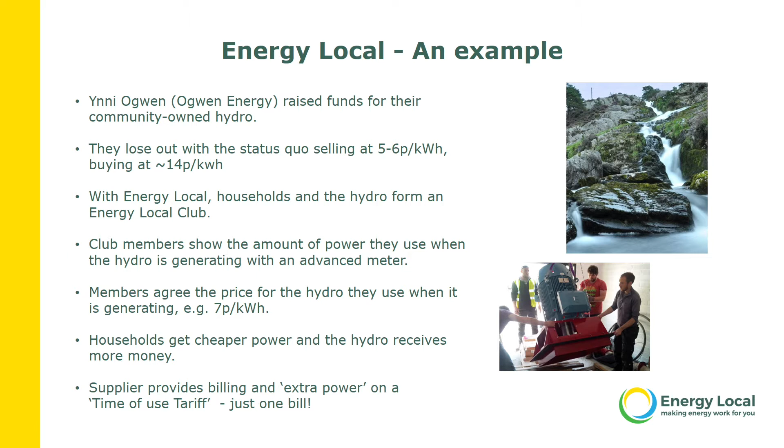So this project, under this work stream, is a means to make it much easier for people to get the best out of Energy Local.

One of the things to emphasize in what I've described is it's what we call before gate closure. There's a lot of work about, oh my goodness, we haven't got enough power, or we need to mop up all that solar after what's called gate closure - that's the point after everybody stops trading electricity and National Grid takes over. What we're doing here is saying, how about we encourage people to use power the way we'd like them to before that point.

So we're actually changing the demand curve so we don't get into that slightly emergency situation in the first place. We're focusing initially on Energy Local Bethesda - there's just 100 households, they all have half-hour settlement. First of all we started with what we call an energy dashboard, to show the good and bad times to use power during the day.

And now we're developing what's called the Energy Local Home Hub. It means people can say, I need this appliance finished by X time, it takes this long to run, find the best time to run it during the day. So if it was a sunny day, it might be in the middle of the day if it's solar, for example. The household stays in control, so it gets away from that feeling of big brother switching your washing machine on for you.

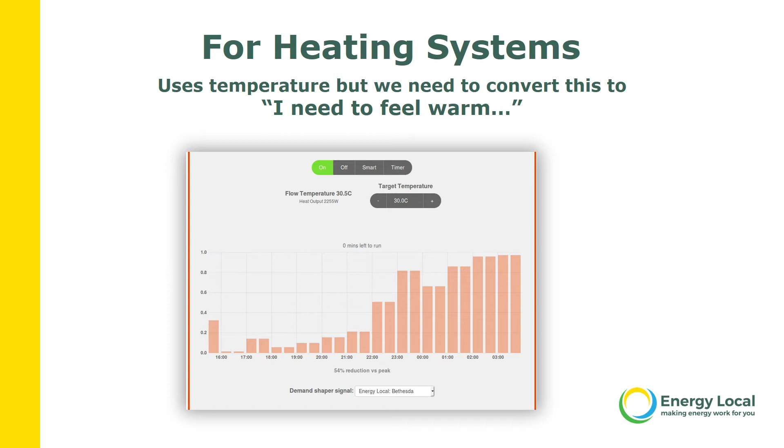All that said, although we're trying to do this before gate closure, we have also demonstrated the principle of sending an emergency turn-down signal if things are really going a bit pear-shaped. It automatically uploads this to the demand signal, so it will reschedule any loads that have been scheduled to avoid that time. And we've shown that in principle.

Originally, we'd have to wait until there actually was an emergency to show it in anger, but we have actually shown the principle of it. And I was monitoring my washing machine, and it moved its schedule to a better time.

That said, it's not something that we want to use the whole time, because the whole idea of this is that we're actually trying to change people's habits. And if you keep sending erratic signals, then people don't know whether they're coming or going. So it would have to be used quite carefully.

I think probably one of the things that is really quite unique about what we're doing, though, is not just about the technology. It's also about getting people's feedback, understanding where things fall over, where people get stuck, how we need to improve it, and actually really getting people's feedback of what they want.

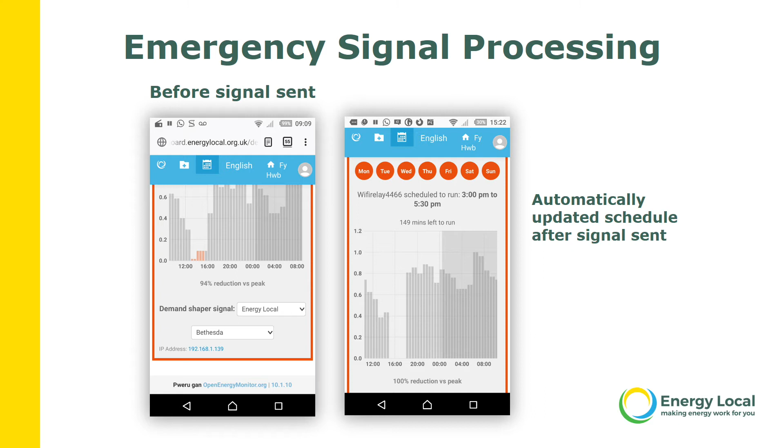So that gives you a brief overview of what we're doing. Yeah, very happy to answer any other questions.

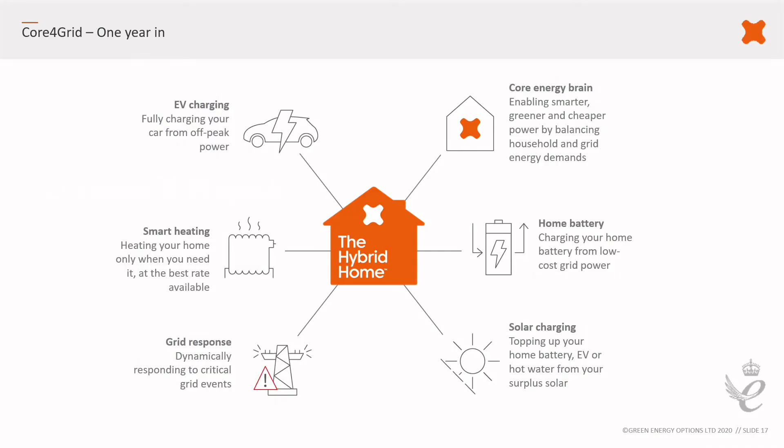So the project, we set out with this high aim to demonstrate market and household acceptance of and engagement in the domestic flexible future grid via hybrid homes today. Easy to remember? Yeah. So we shortened it to just demonstrate acceptance of the flexible future grid today. It's a 2-year project, £1.4 million of funding, part BEIS, part industry funding, and started back in November.

Obviously, we can't do that alone as a tech company. We can do the bit in the home, we do that well, but we needed some homes to try it in, so we brought on board some partners, a Housing Association Charitable Trust and a couple of housing associations who had homes that would be suitable. We then needed the energy infrastructure, so we brought on board Upside, EDF, and UK Power Networks, all already active in our energy system, who already understand the flexibility markets and do it for the non-domestic side of flexibility. So lots of learning we could get there.

Everoze are a brilliant consultancy, and they set the groundwork in terms of what questions we are going to answer, what we are going to try and solve. And then Cambridge Energy are our academic authority, making sure that what we say is actually true, and they're a third party. They've not got any reason to stay friends with us in that sense. They can tell us the truth.

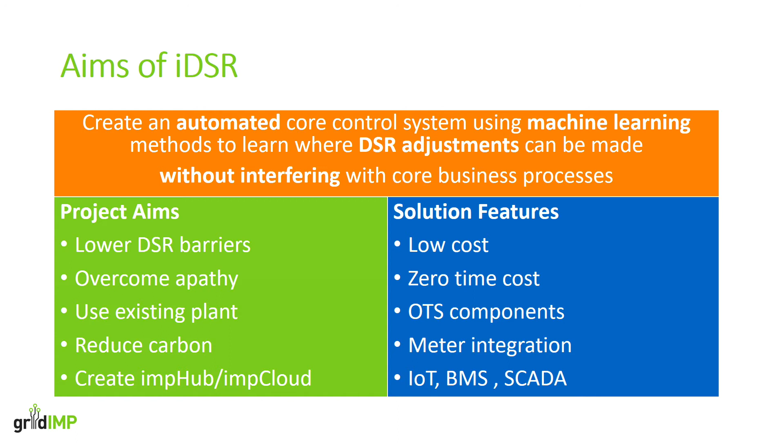So, because we're near the end of the project, I really should have done this step by step, but I'm not going to go through all the steps. But basically, we started off and we did some test installations. A lot of our work on the software development side has been to get our control policies working properly, to ensure that we can identify these loads, and to be sure that we can do all the administration around that and package it up in such a way that it doesn't impact on customers whatsoever.

So we started off installing other test partners. Then very early on, we had an industrial partner come on board, another SME.

We've been working away at recruiting more test sites. We're in a few universities now as well. And we carried on just doing our development work and telling people about what we're doing. But what was most important for us was listening to the customers and really getting feedback on what would stimulate them to action. Because if we've got a solution that doesn't require any effort on their behalf, why wouldn't they have it?

Well, on the 8th of December last year, we had a 6-hour period where people were paid to use electricity. The price of electricity dropped to around about minus £60 per megawatt hour. Okay. Now, the cost of offshore wind energy also has plummeted in the last 10 years from about £140 per megawatt hour to £40 per megawatt hour. So to put that into context, the cost that was paid to the consumer to actually use energy in this period exceeded the cost of actually producing offshore wind energy.

As you can say, is this going to be a black swan event? Is this going to be a rare pricing event, or are we going to see more of this kind of thing in the near future? If we take a business as usual across Europe case, we can see that this isn't going to be a rare event. This is going to get more and more prevalent.

In the last 3 months of last year, large producers of wind energy were paid around about £30 million a month to stem the flow of electricity onto the UK network. £30 million a month. On average, it's around about £170 million a year to either stem the flow or to cut off altogether. Okay? It might seem like an extraordinary amount of money, but in terms of upgrading the network to accept that amount of energy, it's a drop in the ocean. So I think we're going to be seeing a lot more black swans all over the network in the coming years. God bless them.

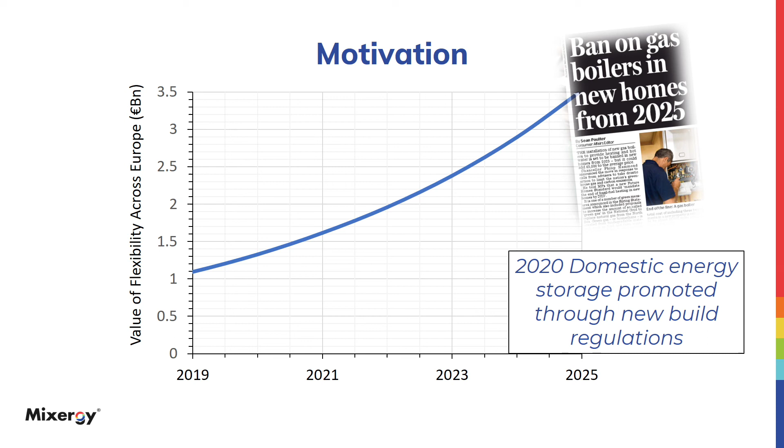So what is this situation driving? What is this driving in the marketplace? What it's driving, as we've been speaking about today, is the value of flexibility across Europe. So the flexible grid technology. By 2025, the value of this is set to triple, by which point there's going to be a ban on gas in new build homes, we think.

I don't know what your life choices have been, but I've got 2 young girls. And I know that if I don't give at least a big stint of lithium-ion powered Peter Rabbit per day, then I'm going to be far greyer than I am now.

So we all know this technology works, it's being developed all the time, and it's a way of harnessing that power when it's been generated, not wasting it, and then deploying it as and when required. It's a sexy technology, but these are some of the common problems with it. So it's a high capex. We're talking, for a Tesla Powerwall, around about £7,000 installed, okay? The return on investment is around about 10 years, but depending on how the battery's been cycled over its lifetime, you're going to have about a 10-year warranty on that, okay?

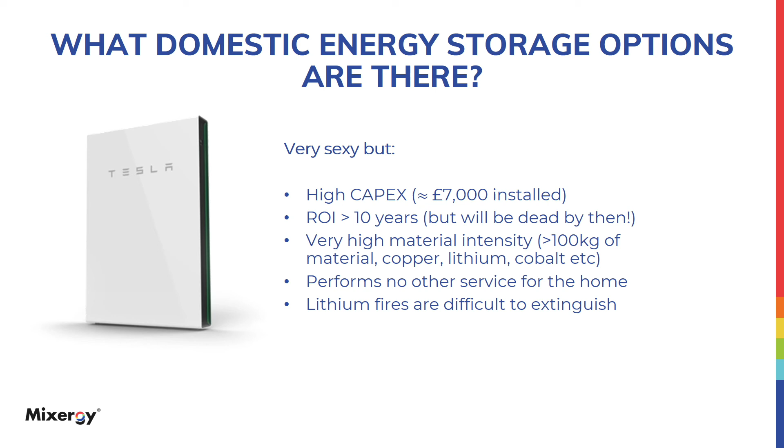It's a very high material intensity, so greater than 100 kilograms of material, so copper, lithium, cobalt. I don't know if you know anything about lithium mining, but it's having devastating consequences in 2 of the premium areas, Chile and Tibet, devastating consequences on the environment, okay? Despite all that, the landscape for lithium-ion technology is there, as is exemplified here by the Tesla Gigafactory. We're all aware of this. There's another one planned in the near future.

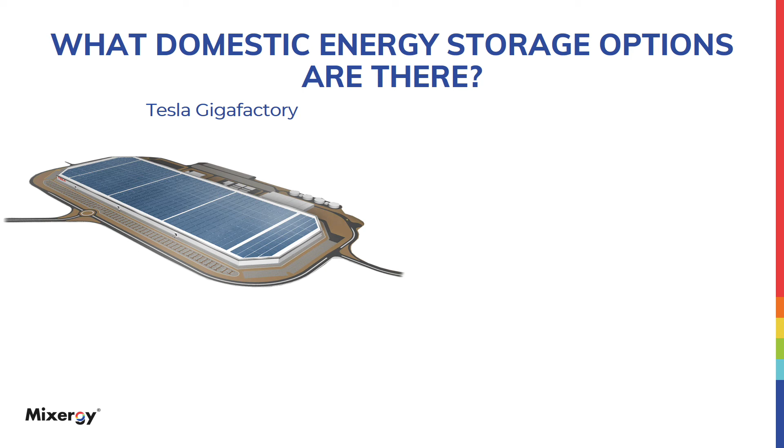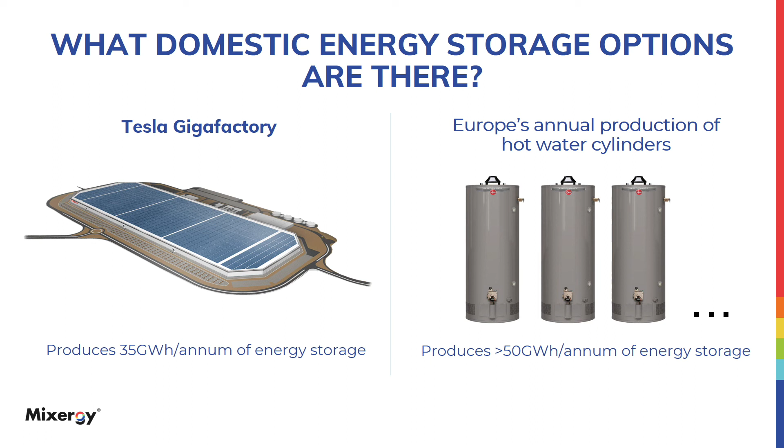But we already have a Gigafactory, and that's the incumbent production of our hot water cylinders in the UK and across Europe, okay? Annually, we produce a potential of 50 gigawatt hours per annum of energy storage just through the humble water cylinder.

The problem with conventional tanks to achieve this: they're slow, they're wasteful, they're dumb. They take hours to heat up. They're effectively just giant kettles. You have an immersion in the bottom. It's just heating a body of water. Regardless of how much you need, you've heated that whole tank to reach a usable temperature at the taps, okay? So they're wasteful.

All the water is heated irrespective of need, as I've said. And the control system, I mean, you can turn it on, you can turn it off at certain times of day and just set the temperature, that's it, okay? So they're archaic controls, effectively.

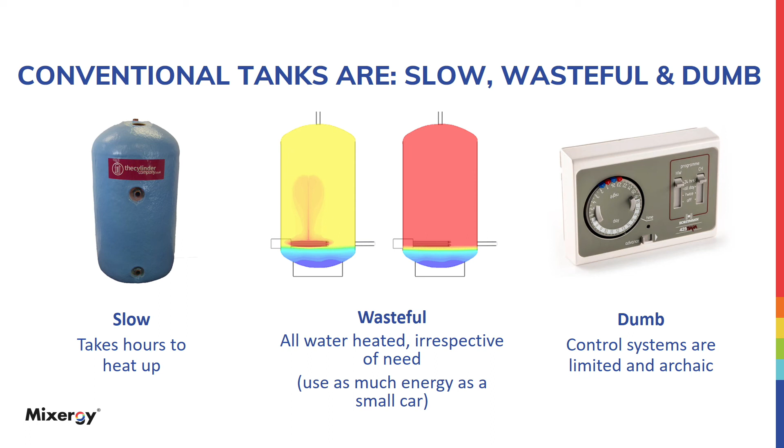So how does Mixergy solve this? Well, as you can see on the left-hand side of that picture, we've got a conventional cylinder with a bottom immersion. So as the cold water comes into the tank, we're effectively just mixing. All the energy you've used to heat the water up to that point is just being diluted. So to reach a usable level of hot water, we've got to heat pretty much 90% of that tank.

Now the Mixergy cylinder, instead of heating from the bottom, we heat from the top. So the immersion's at the top of the cylinder. And what we do is we manipulate the process of stratification - literally driving that hot water layer down. We're getting the hot water to sit above the cold water.

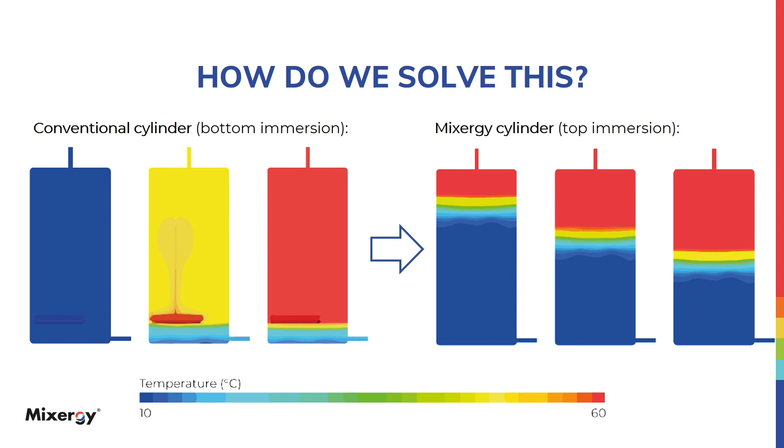Linked to our novel sensing arrangement and our software platform, we can see the headroom that's left in all of the tanks. We can link them together, they can speak to each other. And what that can do is we can take 10 gigawatts of power off the network at any given moment, so we can speak to the grid.

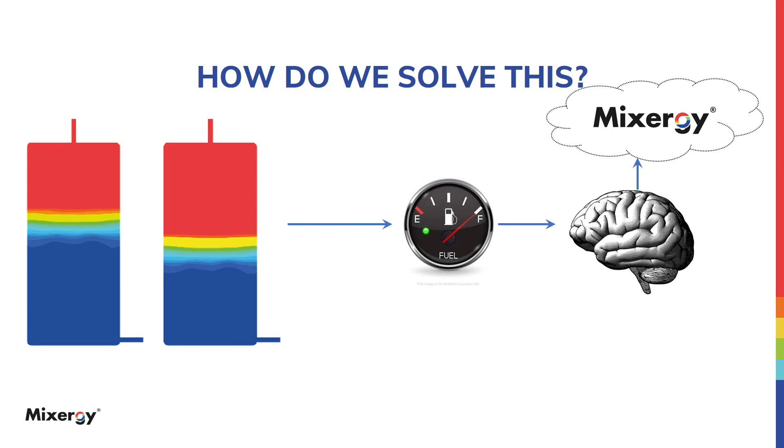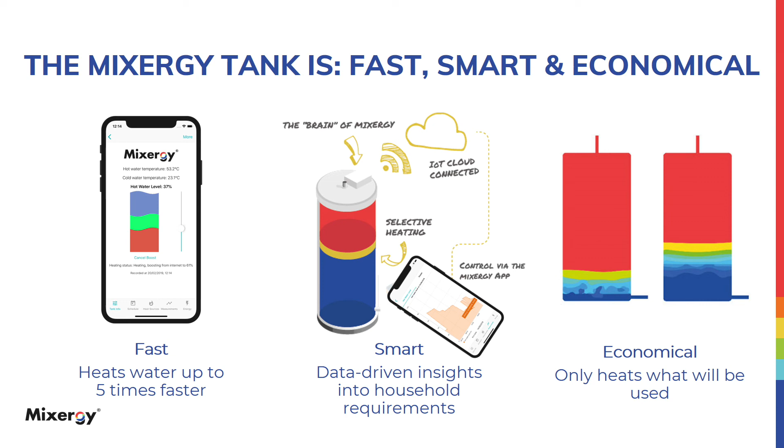So it heats water up to 5 times faster. Our data-driven insights into household requirements are there all through an app on your iPhone or Android, and it only heats what will be used. It's halving the heat losses.

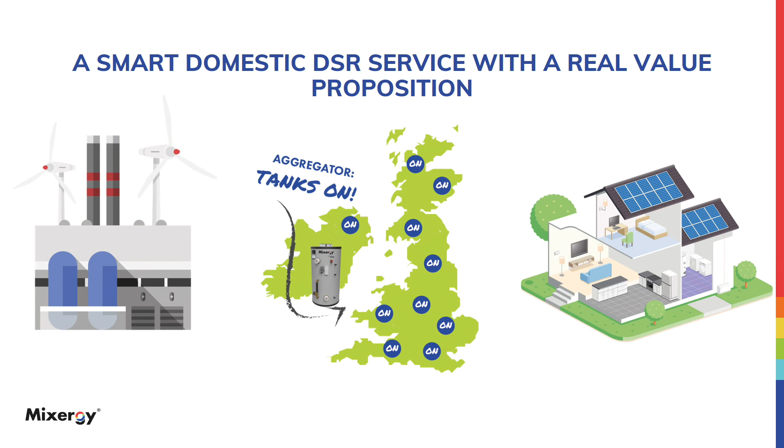So there is a sexiness, we think, similar to lithium-ion technology, but a very low capex - no more than sort of £200-300 additional cost over a standard cylinder. Return on investment around about 3 years, and a very low intensity of dry weight materials, all recyclable.

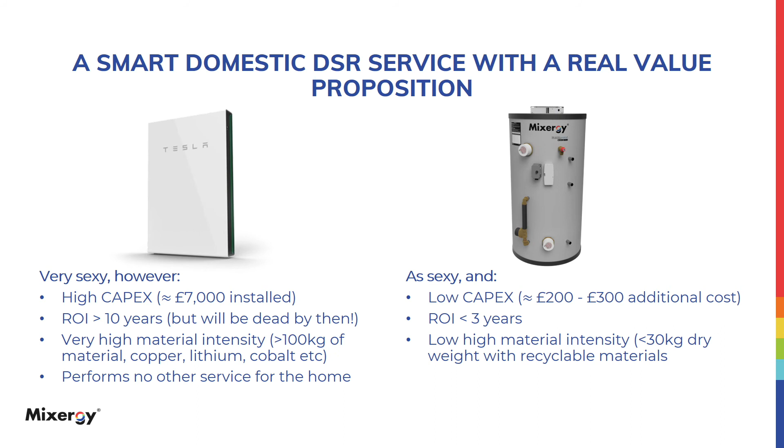Okay, so what have we been up to now? So we've now rolled out nationally with British Gas and with National Grid through Centrica.

In terms of the fleet project with BEIS, we had funding of around about 670 grand. This is with Restore Energy and Mixergy Limited. So the primary goal of the project was to prove the viability of a residential demand response service through the deployment of smart hot water tanks alongside software integration with the trading arm of a particular utility.

We're deploying a test fleet of 50 intelligent tanks with Restore to explore this novel demand-side response control strategy, to explore different domestic environments within the project's duration, and to test different propositions to the householder. The project has concluded, successfully installing these cylinders across a range of different house types, bed types, and water usages. Now we've successfully rolled out demand-side response across a much wider Mixergy portfolio with Restore, outside of these initial 50 trial units.

Okay, so our next steps involve much wider engagement through regulation bodies and to build what we call the Internet of Tanks - a fleet for the grid balancing service. Well, hopefully that's given you a little bit of an insight into Mixergy and what we're trying to do with a humble hot water cylinder. But thank you very much for listening. Cheers.

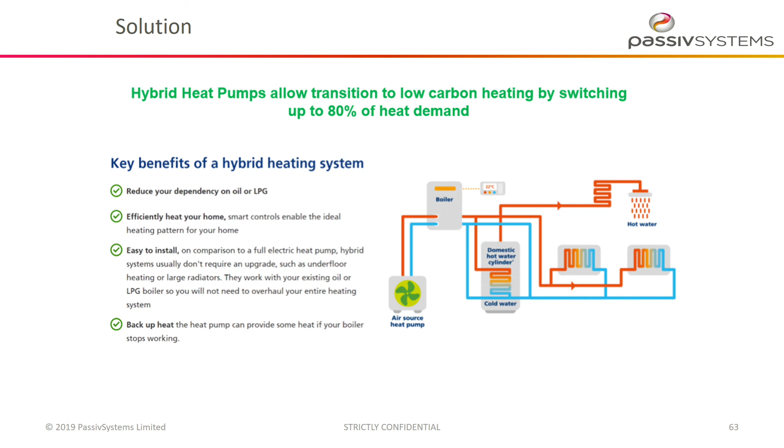The consumer offer that's out there is a £99 upfront package with a £14.99 per month fee for the smart controls. And there's also an option from EDF to go onto a Go Electric tariff with a very favourable 10 pence per kilowatt hour rate.

And then there's benefits that the customer will experience. They don't have a change in comfort levels, or if anything, it's improved. They significantly reduce their reliance on LPG and oil, which reduces their concerns about LPG and oil. There is a transition to low carbon heating. It's easy to install, with low overall costs.

We give them a wealth of after-sales support. There are behaviour changes - they'll notice the heat pump coming on, and they'll notice the home preparing to reach temperature rather than just flicking a switch and all the radiators firing up. So there's an education piece we're working closely with the Energy Systems Catapult on, trying to ensure that people who take on this new system understand what they're getting and what the impact to their normal life is, because it will be a change.

Subsidised, as I mentioned, by assigning the rights from the RHI incentive. And that's it. Thank you.